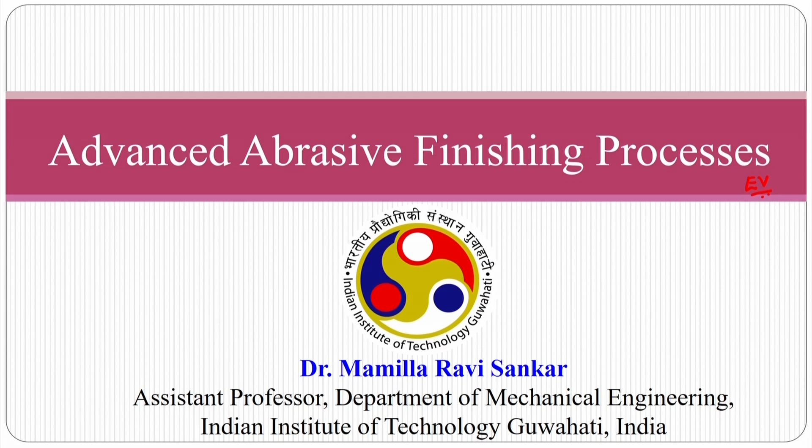Today we are going to study about advanced abrasive finishing processes, which is a particular sector of abrasive processes where you will see advanced versions and do the finishing of complex surfaces as well as simple surfaces.

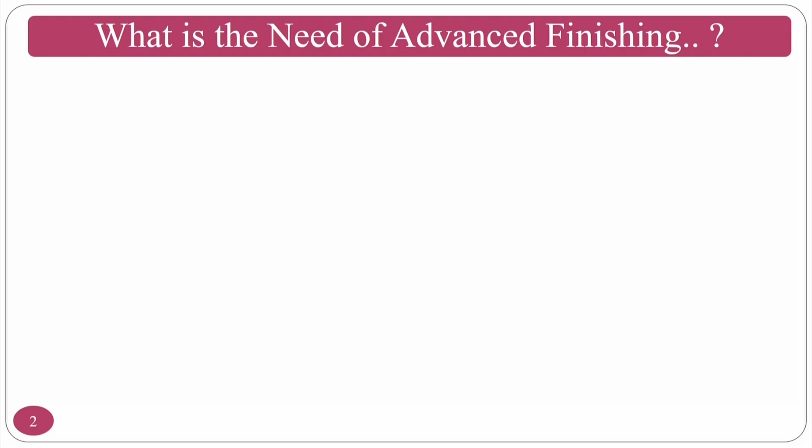So what is the need of advanced finishing processes? Conventional finishing processes such as grinding, honing, super finishing, and lapping you have seen, and we move on to advanced machining processes where MRR or material removal is the primary criteria. Now we move on to advanced finishing processes where our primary criteria is to finish to the nano level of simple to complex geometries.

So what is the need to reduce the friction? It means that if you are going to get the micro to nano surface finish, you can reduce friction and improve fatigue life.

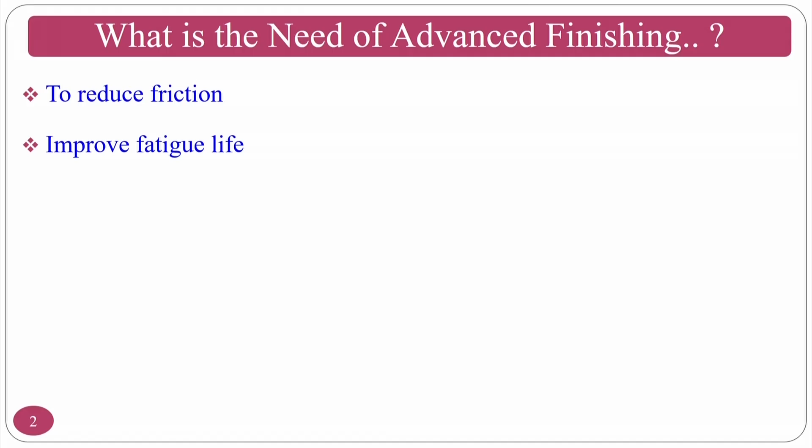If your surface is very rough, what will happen? The fatigue life is very low. Assume you have a shaft and a bush - if the bush is too rough, the shaft will locate on the peaks of the bush surface roughness, and whenever you rotate at high speed, these peaks will burnish or shear off. Then eccentricity will generate and the fatigue life of that system will collapse.

Reduce the generation of crack formation - if surface roughness is low, it can reduce crack formation. Under practical conditions, surface roughness will start initiating cracks. So if you go for nano finishing, this possibility will go down.

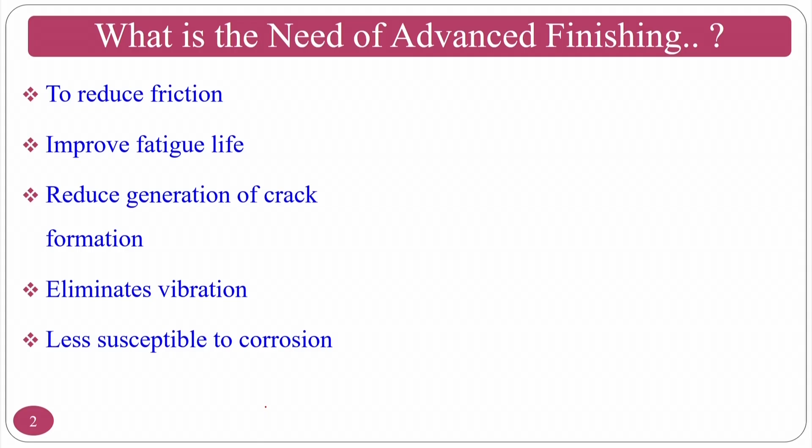It eliminates vibration - a too rough surface always has chances for vibrations in the system. It's also less susceptible to corrosion. If the surface peaks are like this, whenever there is a flow of fluid, the valleys will accumulate the liquid, and this will initiate corrosion and other problems.

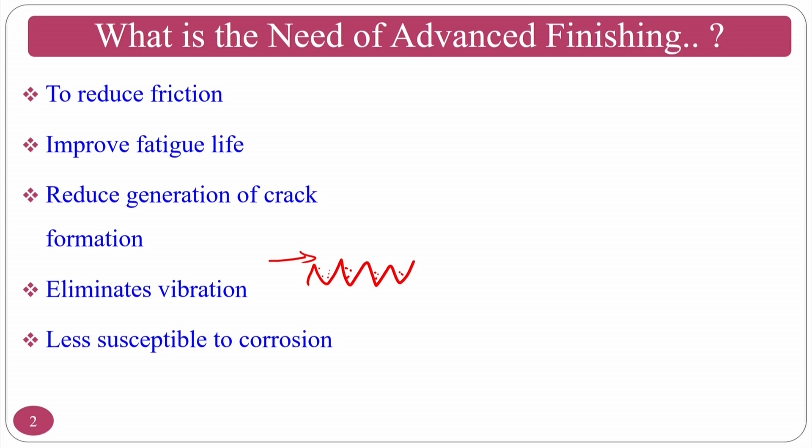The advanced abrasive finishing process also has the advantage that you can finish complex surfaces, such as this small turbine or impeller. Here the initial surface roughness is 1.75 and finally it is 0.4 microns.

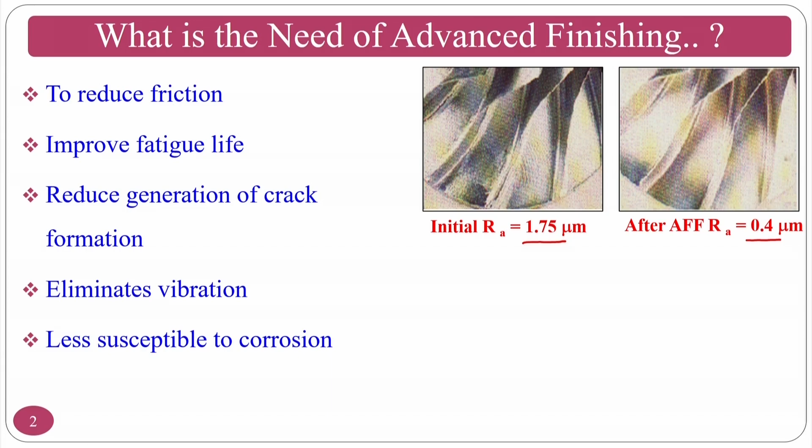The most important thing is that you can achieve this by hand lapping also, but automation is always good. So advanced finishing processes with computer numerical control systems and other things will always be good. One can also finish knee implants by advanced finishing processes - not only abrasive flow finishing process, but also MRF, that is magnetorheological finishing, and other things.

This particular section deals with polymer assisted abrasive flow finishing processes as well as magnetorheological finishing processes, and what are the advantages and limitations of polymer rheological abrasive flow fluids as well as magnetic rheological abrasive flow fluids. We will see these things in depth in this section of the course.

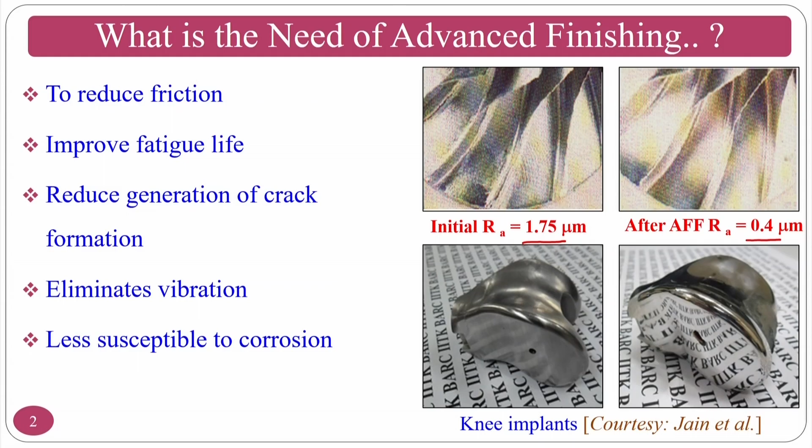We will move on to the first process, called abrasive flow machining process or abrasive flow finishing process. Initially this particular process was called abrasive flow machining process because it was used for deburring applications in complex features, assuming there is a junction of two holes or multiple holes.

At the junction of internal holes - 2 or 3 holes internally - if there is burr generation, it is too difficult for any person to remove it. For that purpose, semi-solid type tools were developed, and you extrude across that section so it will deburr that. Deburring is nothing but a machining operation - that is why when this process was invented in the 1960s, it was called abrasive flow machining process.

Gradually people started using it for finishing applications - that is why this process is also called abrasive flow finishing process.

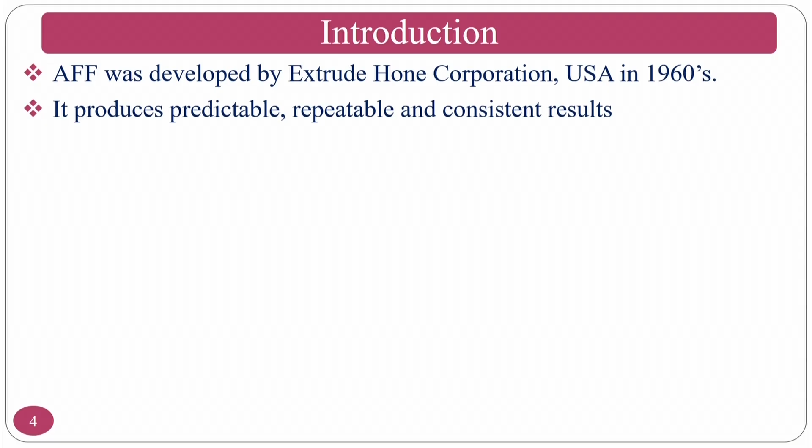Introduction to abrasive flow finishing process: it was developed by Extrude Hone Corporation in the 1960s in the USA. It produces predictable, repeatable and consistent results because of its ability to extrude across sections uniformly. Up to 90% of time can be saved by using AFF compared to hand finishing operations.

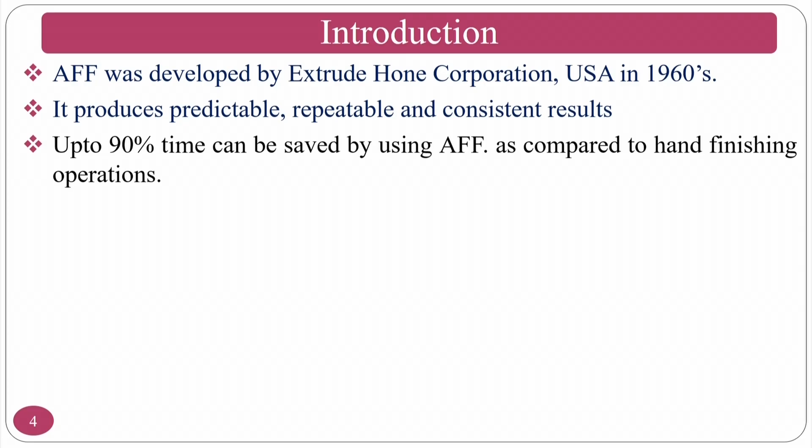Hand finishing operations are not controlled by automation, so to get uniform surface finish you need well equipped and well experienced operators. But in abrasive flow finishing, you can go ahead with automation to do this process. Principal finishing parameters of AFM are setting parameters - that is, input parameters like extrusion pressure, number of cycles, and other things.

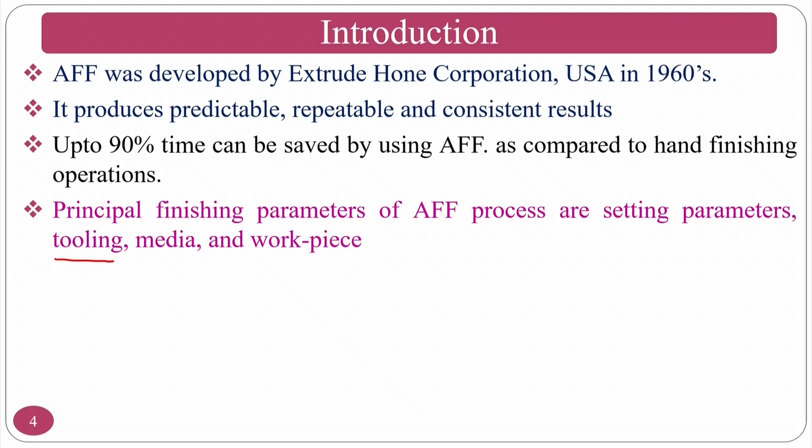Tooling is nothing but how to hold the different work pieces. Medium, that is abrasive medium or media, can be styrene-based polymers or silicone-based polymers, along with workpiece parameters such as initial surface roughness.

It can produce surface finish as good as 50 nanometers and deburr holes as small as 0.2 mm radius, handling edges from 0.025 mm to 1.5 mm. It is easy to integrate AFM into any automatic manufacturing environment.

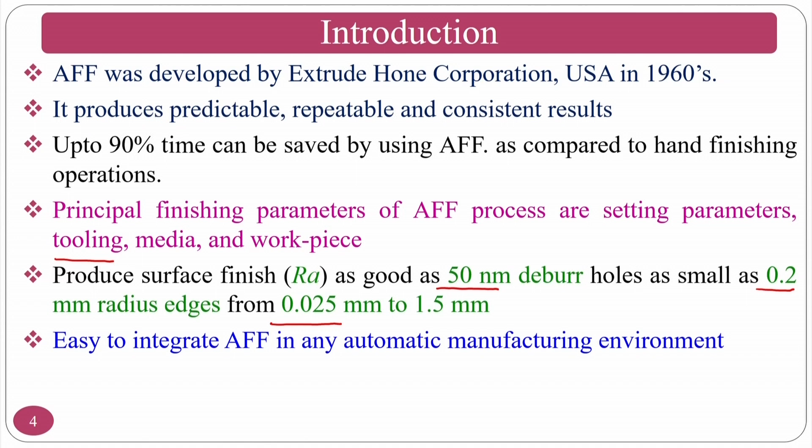By understanding and controlling the process parameters, AFF can be applied to an impressive range of finishing processes based on your requirement. Normally, the finishing operation is the final operation for any type of component manufacture, and 15% of the production cost is always incurred in the finishing operation.

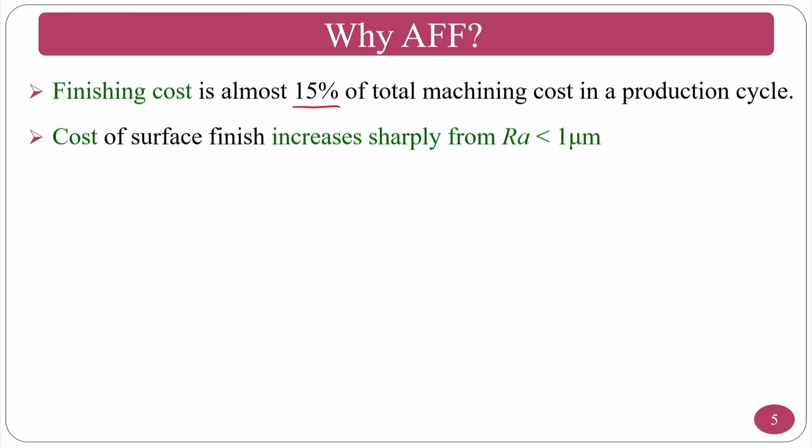The cost of surface finish increases sharply from less than 1 micron. That means if the surface finish requirement is mandatory for a particular component, the surface roughness is inversely proportional to the cost. If your surface requirement is in nanometers, the cost of the product escalates very high. So if the roughness requirements are low, then the cost of the product goes up.

Abrasive flow finishing, or abrasive flow machining, produces extremely thin chips, allowing better surface finish, closer tolerances, and more intricate surface features. Predominant texturing has also been observed.

It can finish hard and difficult surfaces, like hard materials or hard steels. It can be automated and offers better accuracy, efficiency, economy and consistency, and this process is also used for producing compressive residual stresses.

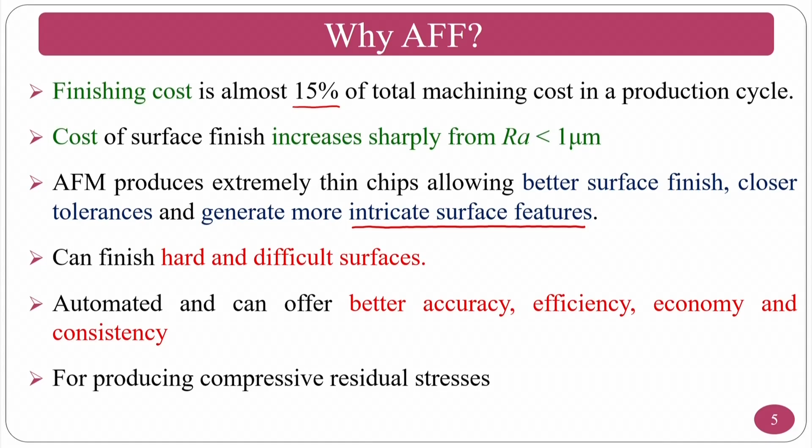When reciprocating the medium across the workpiece, as you will see in upcoming slides, there is a possibility of compressive residual stress generation. Some papers on abrasive flow finishing have reported these compressive residual stresses being observed. If compressive residual stresses are present, it is always good for practical applications.

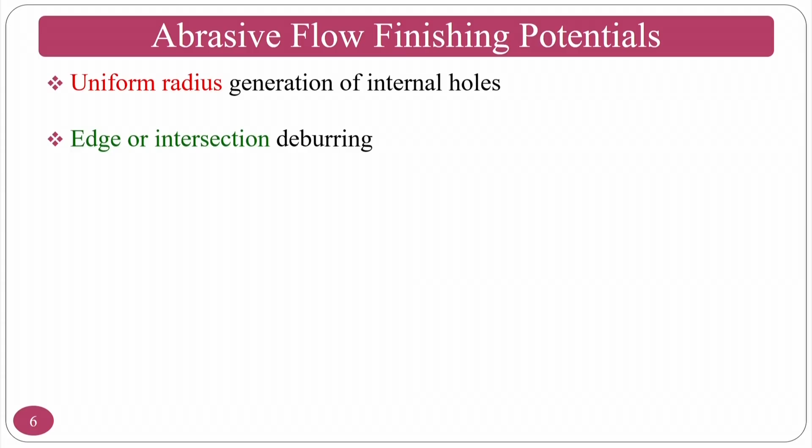Looking at the potential of the abrasive flow finishing process, uniform radius generation on internal holes can be achieved. Edge or intersection deburring, where two holes intersect internally, is completely difficult for a conventional finishing process to handle at that location.

For this particular process, it will be easy because you are going to use a liquid to semi-solid type of tool. How to fabricate or design this type of liquid-based tool and other aspects, we will touch on in the introduction.

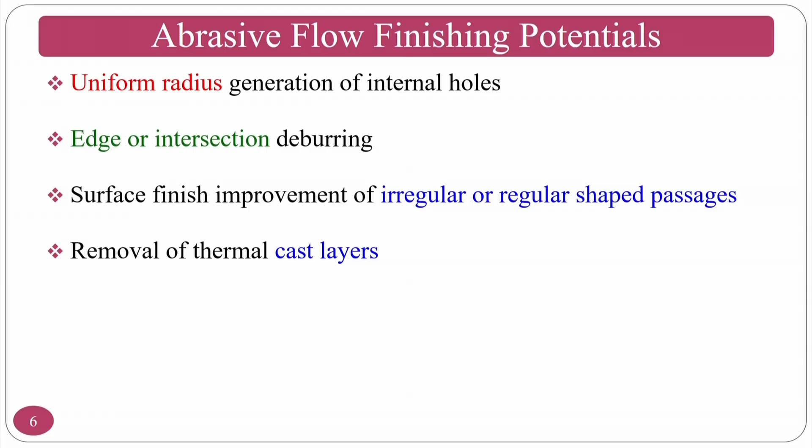Surface improvement of irregular and regular shaped passages can be achieved, along with removal of thermal recast layers. Whenever you have done processes like EDM or laser beam machining, these thermal processes form a recast layer, as we have seen in previous classes.

This recast layer is not good for practical application because it is a brittle layer, and thermal cracks will be present. When used in practical conditions, this recast layer will come off, causing eccentricity and a lot of noise and other issues. That is why it has to be removed before being put into practical applications.

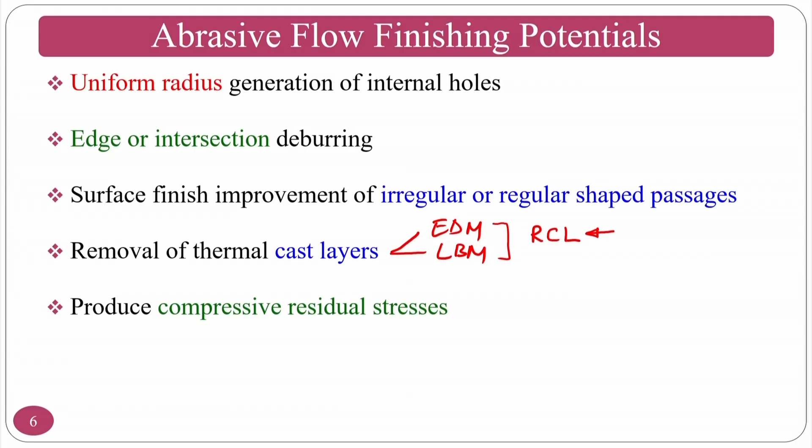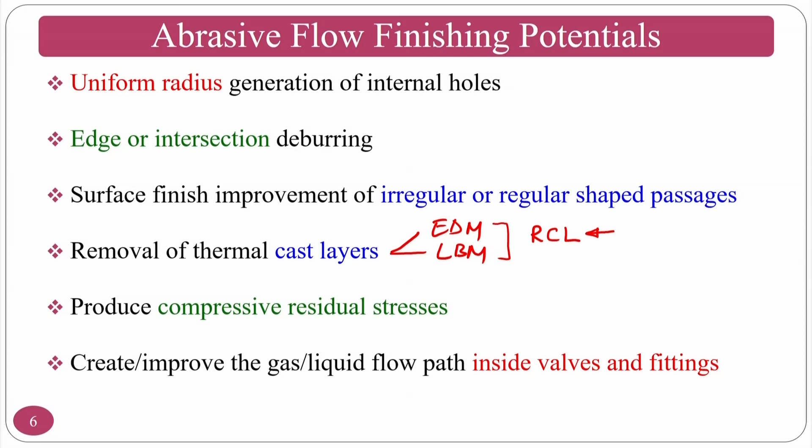It produces compressive residual stresses, which we have seen, and this is good for practical application. At the same time, it can create or improve liquid flow paths inside valves and fittings, which means it can be used for fuel injector nozzles and others where fluid flow is most important and needs to be controlled. There you can achieve surfaces to the nanoscale for better surface finish.

If you look at the AFF process, it has a lot of elements, and we will see the individual elements in the upcoming slides. This is how the AFF process, or abrasive flow finishing process, looks like.

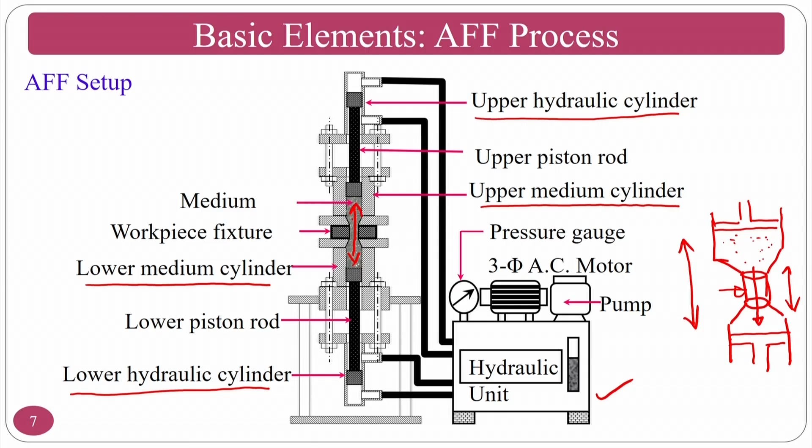For that purpose, the hydraulics unit will supply hydraulic power, which is controlled by a solenoid valve. This solenoid valve changes direction once the piston reaches the maximum limit, moving from top dead center to bottom dead center, and then the other bottom cylinder piston will actuate. I will show you clearly how the finishing region takes place.

You can see here the medium is placed in the top medium cylinder. This is the medium, and this is the upper medium cylinder, this is the lower medium cylinder. So the medium has to transfer, or push, to the lower medium cylinder across the workpiece. This is the workpiece.

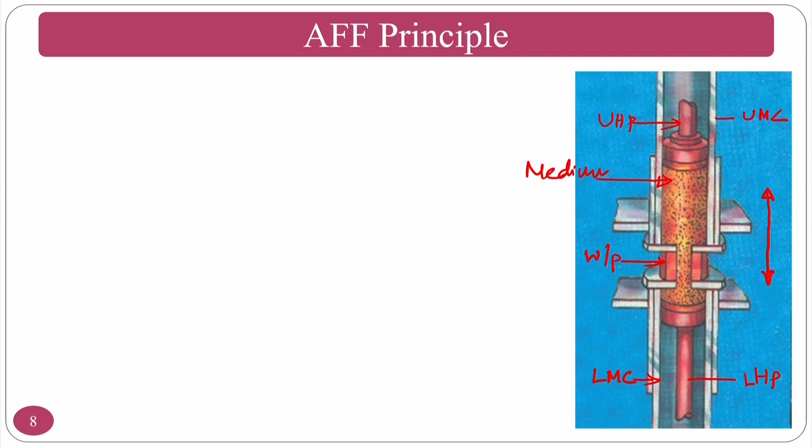What will happen here is the medium is reciprocated like this first, then comes back to the original position. This is the upper and lower hydraulic piston. So if you are reciprocating the abrasive medium, which consists of polymers plus abrasives and other things, it will reciprocate, and whatever internal surface needs to be finished in the workpiece will be finished. Hope you understood.

I have an upper medium cylinder, a lower medium cylinder, and in between a fixture where the workpiece is fixed. Now my intention is to flow my liquid type of tool from top to bottom, bottom to top. For that purpose, both the pistons will move up and down, or reciprocate.

Whenever the lower medium cylinder's piston pushes, the medium flows across the surface finishing zone of the workpiece and reaches the top medium cylinder. Once the top medium piston pushes back, it comes again to the lower medium cylinder across the workpiece. So this reciprocating nature of the medium, which consists of abrasive particles, will shear off the surfaces to be finished in the workpiece surface.

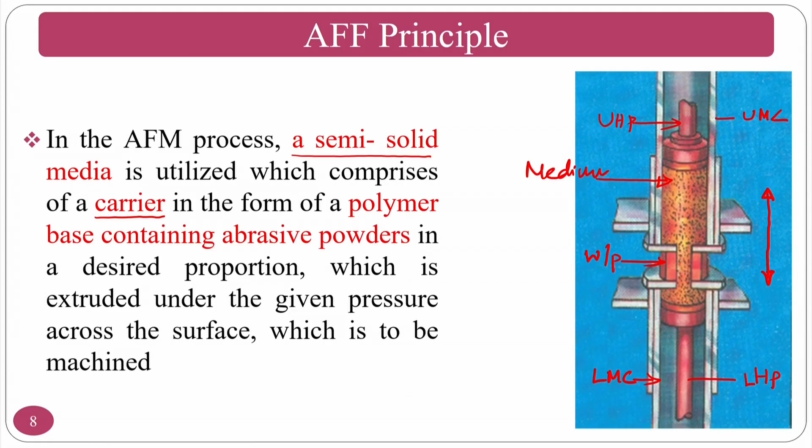So in the AFM process, a semi-solid media is utilized which comprises the carrier fluid in the form of a polymer base containing abrasive powders in desired proportion, which is extruded with a given pressure. That is what I explained, that it will move up and down and material will be removed in the workpiece region wherever it moves across the surface.

Now, how will the material be removed? There is physics behind it. So assume that the finishing region is this particular figure 1. What is happening here is, whenever extrusion pressure P is applied, you have a medium that is viscoelastic. This ash color is nothing but the viscoelastic medium.

This is a viscoelastic medium. Viscoelastic means it consists of a viscous component and an elastic component. The viscous component tries to move along the direction of applied pressure, meaning the medium will be pressurized in this direction. So the viscous component moves in the direction of the pressure, and the elastic component moves perpendicular to it. Whenever you take honey or any viscous fluid like water, and throw it with a certain pressure, what happens?

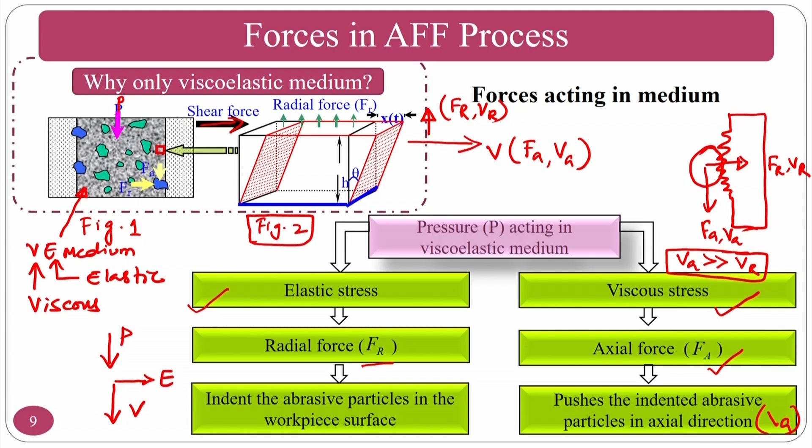What is the main function of radial force? Radial force tries to indent into the workpiece surface, or penetrate into the valley, and it tries to shear the peak with the help of axial force and axial velocity. It indents because of the radial force and moves in this direction because of the axial force and axial velocity. Combination of radial force, axial force and axial velocity gives you a microchip or nano chip, and material removal takes place.

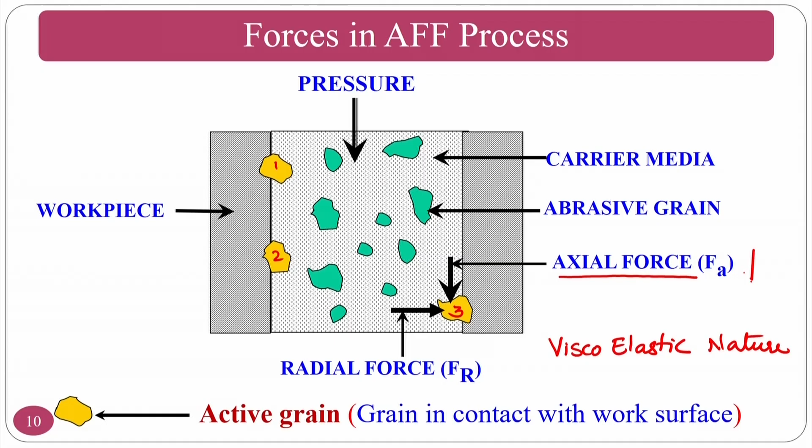Because of the viscoelastic nature of the medium, what is happening here is you can see the axial force along the direction of the applied pressure, at the same time radial force because of the elastic component in the medium. In the previous slide it was congested, so the explanation might not have been up to the mark. For those who have doubts: the viscous component is generating the axial force and the elastic component is generating the radial force.

Assume that I have this particular surface. Whenever my abrasive particle is like this, the radial force will indent like this and the axial force will move, the axial velocity will move here and FR will be there, because of which the shearing action takes place. Shearing of the chip takes place and material removal occurs.

What about the inactive abrasive grains? This particular medium has three properties. One, it is self-deformability. Second is better abrasion and better flowability. So these are the three main components of this medium: one is self-deformability, better abrasion, and the third one is better flowability, flowing ability.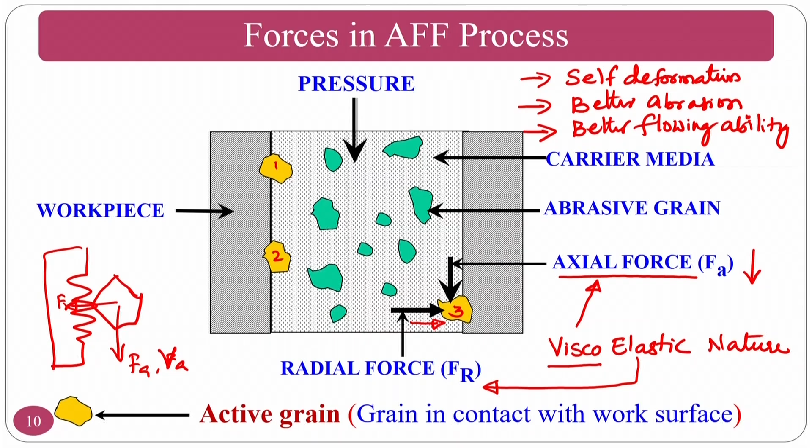So, material removal mechanism, which we have seen here. So, viscoelastic nature is there, and the abrasive particle, as we have seen, gets assistance from the viscoelastic polymers.

So, viscoelastic polymers, if you see here, this is the axial force and this is the radial force, and this is the resultant force. Assume that it is a cutting force or something, the resultant of this one. So, the viscoelastic effect is there, because of which these peaks will be sheared and you can get a good surface finish.

After getting a good surface finish, you will achieve a critical surface roughness value for any type of finishing applications whenever you play with respect to input parameters like number of cycles, extrusion pressure, medium variables, and other things.

So, with respect to number of cycles, what do you mean by number of cycle? If you see figure 1, the medium is reciprocated like this. The medium from the top cylinder to the bottom medium cylinder is called one stroke, and if it is reciprocated back, that means bottom medium cylinder to top medium cylinder, this is called one cycle. That means one bottom stroke and one top stroke is nothing but a cycle.

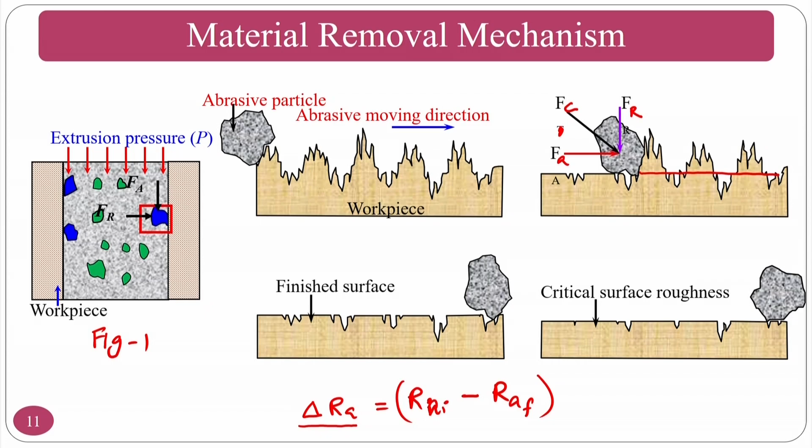Basic elements of abrasive flow finishing: one is the machine setup, that is the experimental setup which is hydraulically operated cylinders used for back and forth motion of abrasive putty and the pistons, as well as medium cylinders. All these things come into the machine setup.

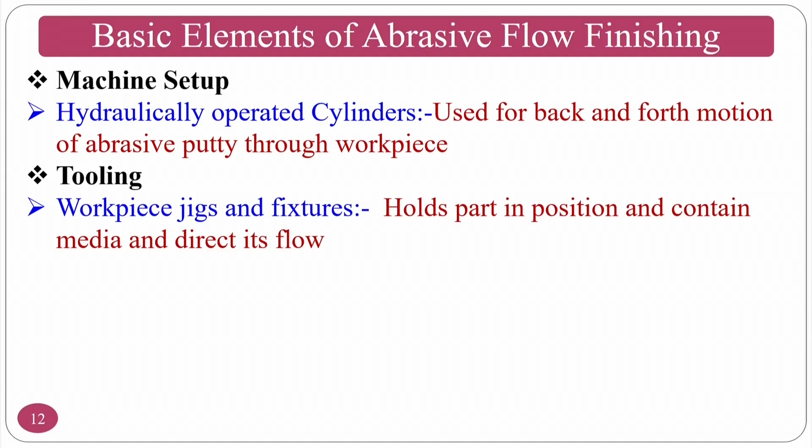Then the tooling, which is basically the workpiece fixtures. If I want to finish a knee implant, my fixing devices hold the knee implant so that medium flows across the surface uniformly. That is the fixture or tooling. If I want to finish a hollow cylinder, minimal tooling is required, but for a knee or hip implant the fixture will be different. So tooling will vary from component to component.

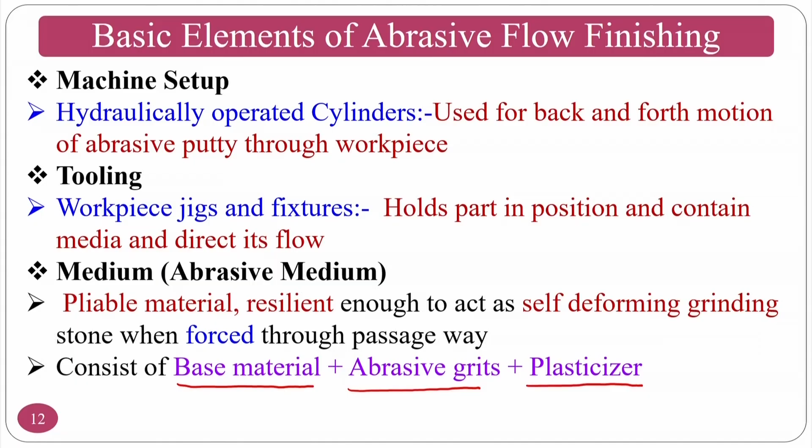The abrasive medium is a pliable material, resilient enough to act as a self-deforming grinding stone when forced through the passageway. It consists basically of base polymer materials, abrasive particles, and rheological additives such as plasticizers, hardeners, and so on. These are some of the constituents of the medium used in the abrasive flow finishing process.

The first basic element of the abrasive flow finishing process is the machine tool. This is a machine tool drawing - if you want to develop your own, the dimensions are given. This is a laboratory scale development with various motions, so that you can accommodate different size and shape components.

This is the main support on which you are mounting. This drawing is done for a radial drilling machine - this support came from the radial drilling machine, and we have replaced the other systems with respect to the medium cylinders.

This is the upper medium cylinder and upper piston, the upper hydraulic piston. This is the lower medium cylinder and lower piston, the lower hydraulic piston. You connect the upper and lower hydraulic pistons to the hydraulic power pack, which is not shown in this picture, and you can reciprocate it.

What is missing here is the medium is not placed in the medium cylinders. These are the two medium cylinders, and the tooling has to be placed here so it can be finished. These are the different things not included.

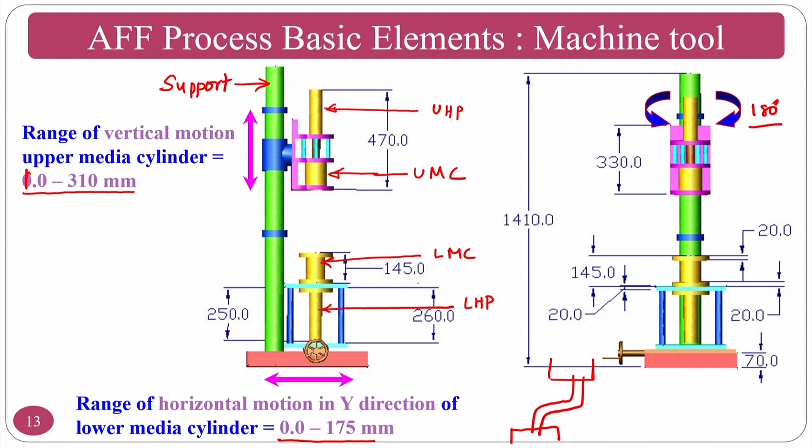This is the experimental original picture - whatever you saw in the previous slide was the schematic drawing. In this experimental setup you can see the lower medium cylinder, upper medium cylinder, upper hydraulic cylinder, lower hydraulic cylinder, and the hydraulic power pack - everything is there, along with the pistons which push the medium so you can get the finish. What is missing here is the fixture and medium.

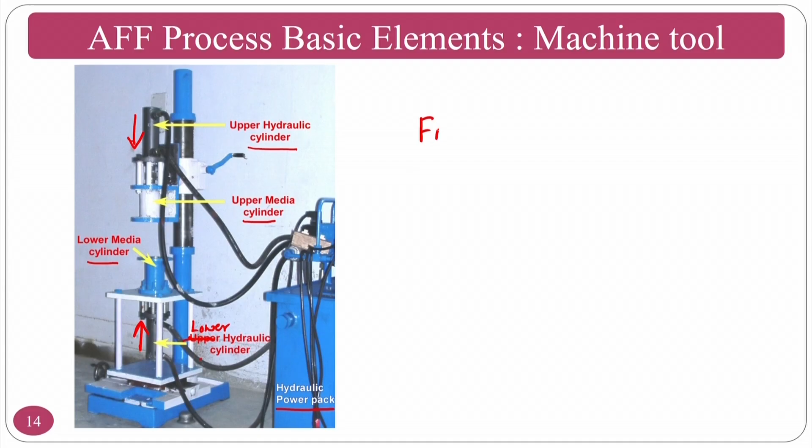Both the fixture and medium are missing. We will see these two elements in the upcoming slides. So the second element is tooling or fixturing.

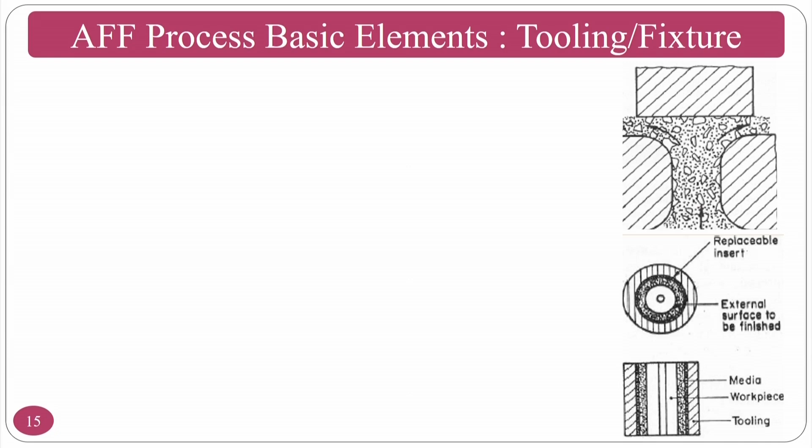Assume I want to finish this particular component - I need to give the tooling as per the requirement, used to confine and direct the flow of medium to appropriate areas, meaning it has to guide the abrasive medium across the surface. The abrasive medium is a semi-solid medium that has to flow across the surface to be finished. If it flows uniformly across the surface, uniform surface finish can be generated. So the tooling's function is to guide the medium across the surface to achieve uniform surface finish.

The tooling also selectively permits or blocks the flow of media into or out of workpiece passages where deburring, radiusing, and surface improvement are required - meaning it has to permit flow only to the regions requiring finishing, and should not go into other regions.

Now we have seen one of the elements of abrasive flow finishing process, that is the experimental setup or the AFM machine setup. So now we are going to see the second element, that is called tooling or fixturing.

The basic function of the tooling or the fixture is to hold the workpiece in position and make the medium flow across the cross sections to be finished. Okay, so how will it do that?

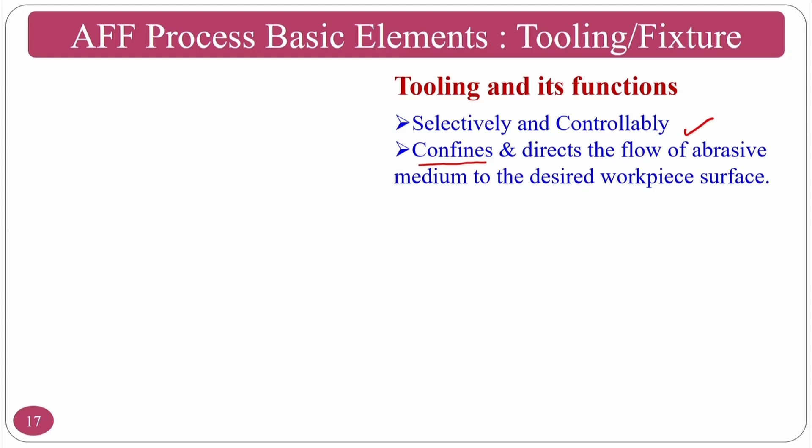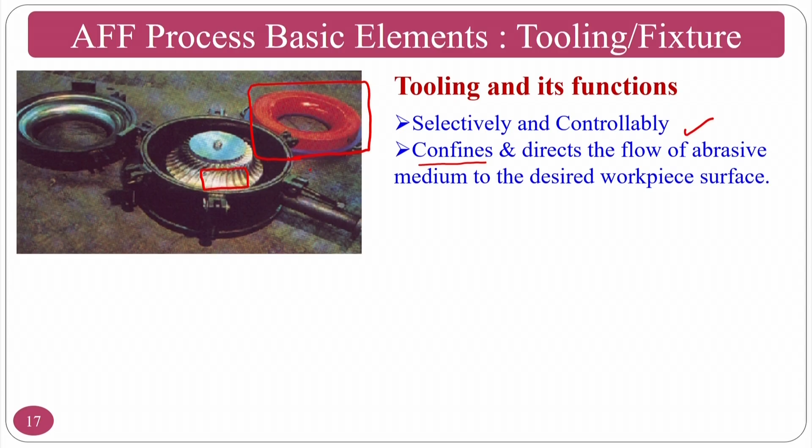These are the workpieces to be finished initially. This is the one to be finished, and this is kept here. You can keep it and put the fixturing, place the medium initially, and start the finishing process. This is nothing but the tooling or fixturing.

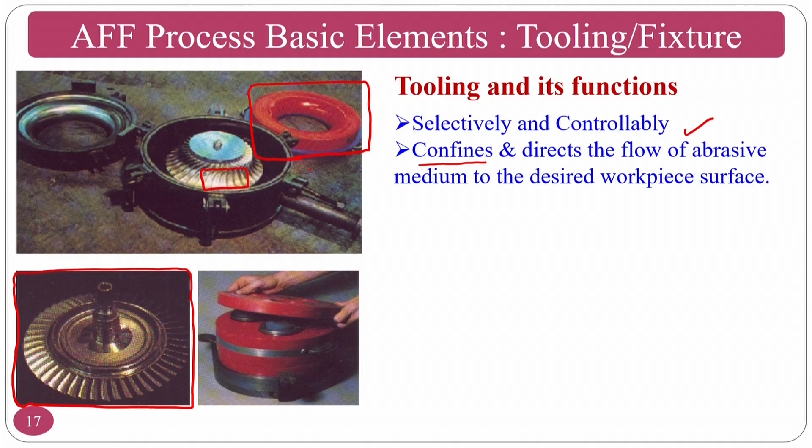This is the measure, and you can see the before and after finishing. Before finishing it is 1.75 microns, and after finishing it is 0.4 microns. This is how the casted blades can be finished.

So hope you understood now what the function of the tooling or fixturing is: to hold the workpiece firmly, while directing the medium across the surface uniformly and controllably to finish that particular section only, not the other sections.

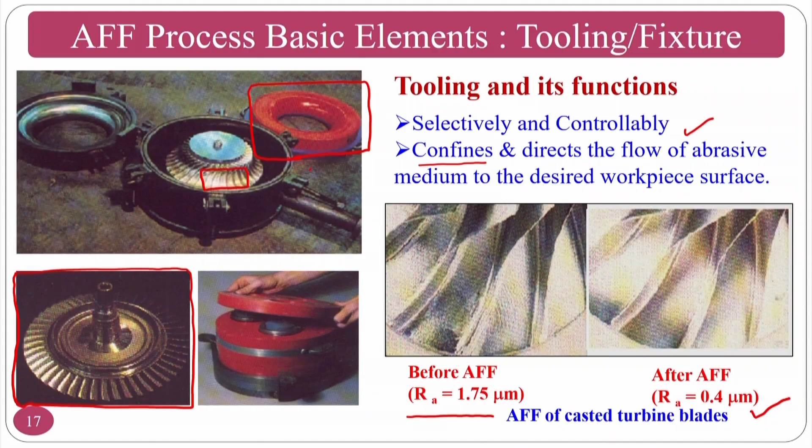Looking at the other functions of tooling and fixturing, it is used to confine and direct the media flow to the appropriate areas for finishing, selectively permitting or blocking the flow of media into or out of the workpiece passages. That means it should not let the media pass out of the workpiece passages, but direct it only to the surfaces where deburring, radiusing or surface improvement is required. It should not allow the medium to move out of these confined regions.

The passages of similar nature are processed in parallel. That means you can finish many holes or many parts in a single go by using proper fixturing.

Replaceable inserts means you can go for nylon, Teflon, or hardened steel type replaceable inserts so that you can stop or restrict the media flow from entering restricted regions. For non-uniform cross-section MRR, the narrowest section has minimum material removal and the widest section has the most, as you can see here.

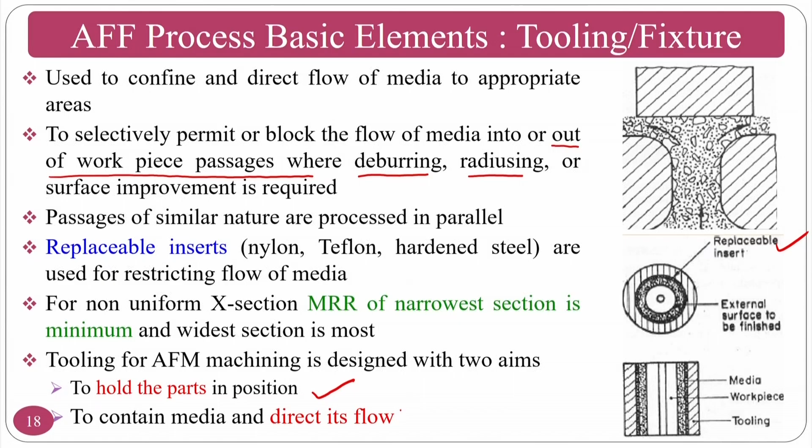Tooling for abrasive flow finishing or abrasive flow machining is designed with two aims: to hold the workpiece in position and to direct the medium flow. This is what I was discussing in the previous slide also.

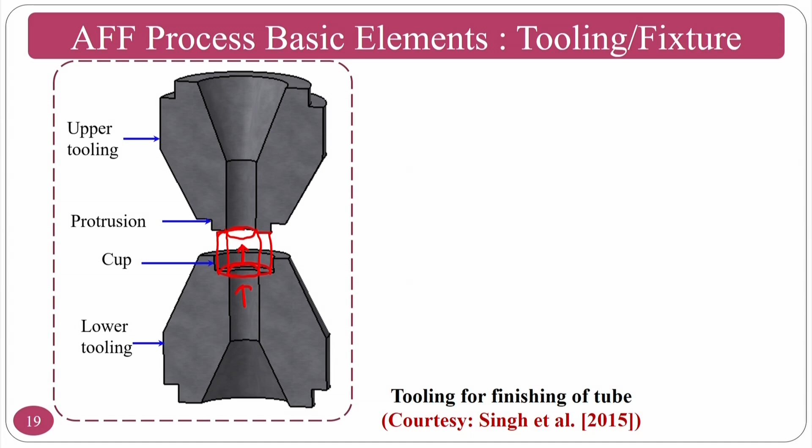Okay, suppose I want to finish a cylindrical workpiece. For that purpose, you can have a cylindrical workpiece and a fixture - to help you understand, we put this particular thing, and this can be the outer diameter and this can be the inner diameter, so that medium flows in the finishing region only. This way you can finish the internal surface of the hollow cylinder and use it in various applications. Similarly, the fixturing can also be done for finishing bevel gears and other things.

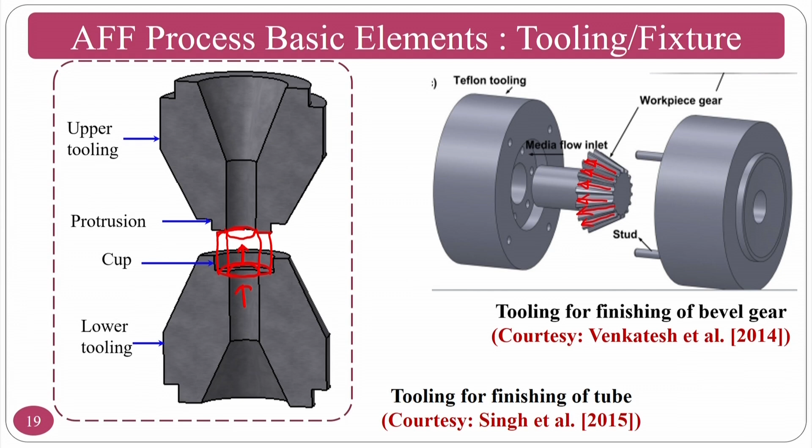Now, if I want to finish a flat surface, assume this is my workpiece and I want to finish it. Till now you have seen cylinders and bevel gears. What about flat workpieces?

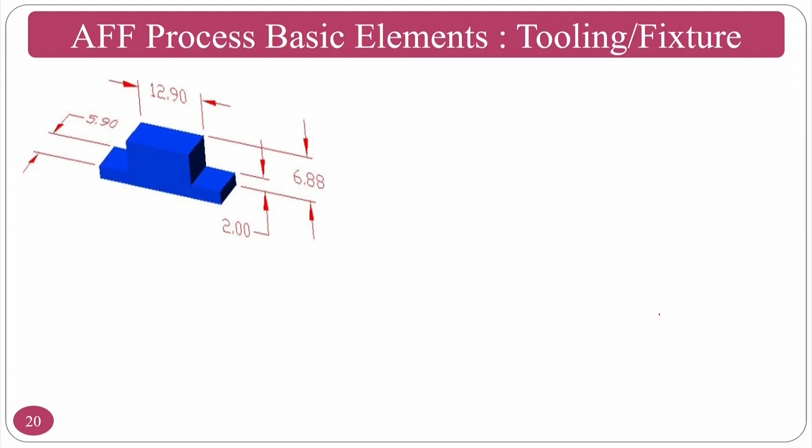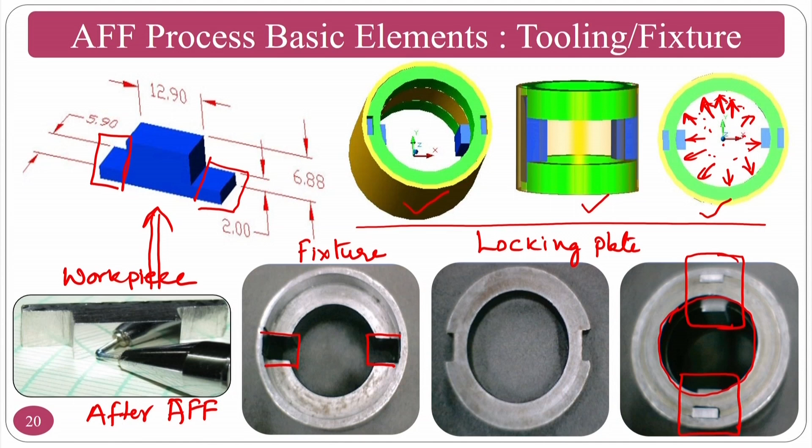So we have seen two elements: one is the machine setup or machine tool, then the fixturing or tooling. Now we move on to the third and main element of this abrasive flow finishing process, which is the abrasive medium.

Normally it is called the polymer rheological abrasive medium, since it comprises polymers, rheological additives, as well as abrasive particles. That is why this medium is called polymer rheological abrasive medium, or if very low viscous fluids are used, it's called polymer rheological abrasive fluid.

This particular medium ranges from semi-solid to liquid phase, so you can call it a medium or a fluid. The plural for medium is media. Many people work on this area for their PhD or master's research, and it is a good area to pursue. Our group also works extensively in this area. The medium is the most important and critical component of the abrasive flow finishing process.

This picture is taken from Extrude Hone, which is now called Kennametal Extrude Hone. The medium has base polymers, viscoelastic polymers with rheological properties, and fine abrasive particles.

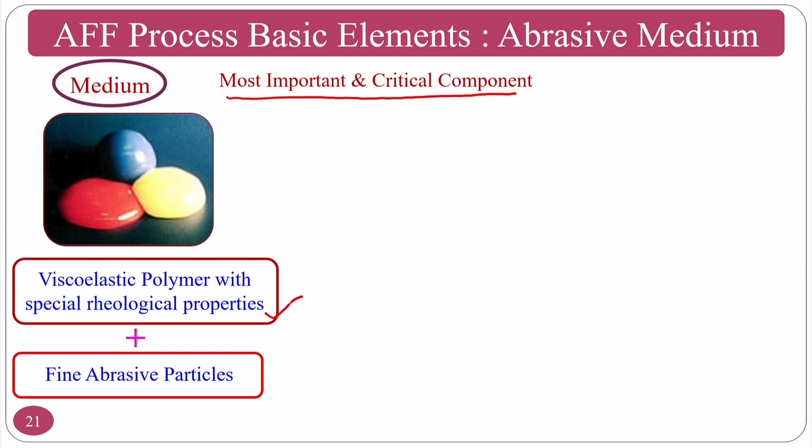What are the rheological additives normally used? Many types of viscoelastic polymers exist, but the commonly used one is polyborosiloxane. Many companies commercially produce this polymer, one of the best examples of viscoelastic material, and this material is blended with rheological additives such as softeners, plasticizers, hardeners, functionalizers, and so on. For low viscous types, functionalizers are added for holding the abrasive particles in location. Many such additives are used.

So one can explore so many varieties of rheological additives. Apart from that, people also use some chemicals to preserve this particular material for a long period without affecting bacteria or any type of microbes.

As I said, the medium should possess majorly three things discussed in the previous slides: self deformability, better abrasion, and better flowability. This is one of the complex things finished here. You can see the medium flow, how it is deforming itself as well as flowing across the section to be finished, and the medium looks like abrasive particles blended with polymers.

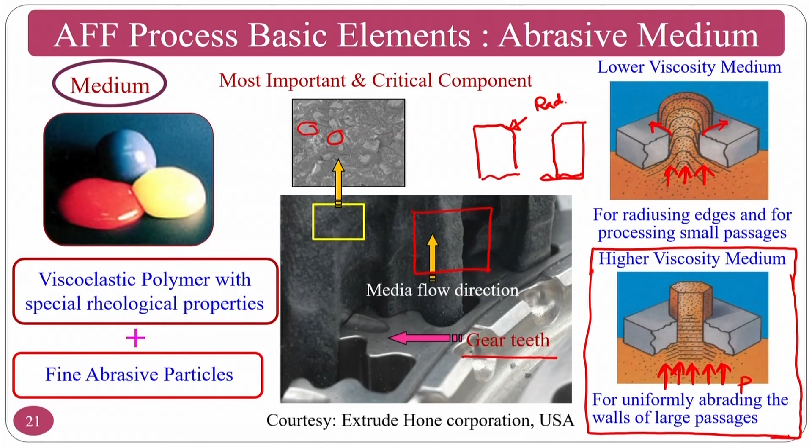So this particular thing will become radiusing. Whenever you get a particular component like this, it will always be safe for people. This is called radiusing - that is the beauty of this particular process, especially when using low viscous medium.

For finishing as well as slight radiusing applications, you can have a medium in between low viscous and high viscous medium, as seen in the figure. This is high viscous medium, this is medium viscous medium, and this is low viscous medium - let me write it at the bottom since red on red may not be visible.

So you can have three common varieties supplied by Kennametal Extrude Hone. You can purchase it, but the basic issue with this medium is that it is too expensive for a developing nation like India, and at the same time you have to discard it once it reaches 10% of its original weight.

As you might have seen with the tool life of a single point cutting tool, whenever the flank wear land exceeds 0.5 mm (500 microns), you discard it. Similarly, the medium life is exceeded when it exceeds 10% of its original weight - meaning if I purchase 1 kg (1000 grams), whenever it exceeds 1100 grams, you have to discard it.

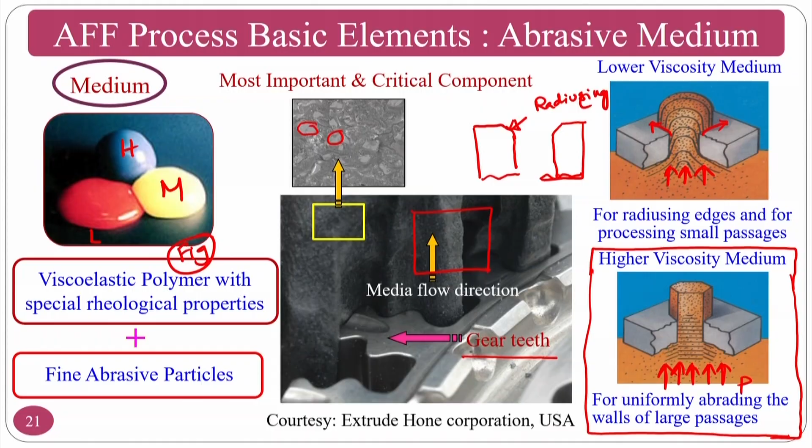So you can see the medium normally. The medium has a lot of abrasive particles in the polymer rheological abrasive medium, where you have polymer, rheological additives, and abrasive particles. So these are the three varieties of things. Polymers are normally solids or semi-solids. Rheological additives are mostly liquids, as well as some solid particles, and abrasives will be solid or ceramic particles. This particular thing is a combination of liquids and solids mostly.

So this is a two-phase medium where you can have interaction between the different things. If you can enlarge the medium, you can see how the abrasive particles are held in the polymer networks. If you see here, this is an abrasive particle, and you can see how it is blended and how it stays inside the medium. There can be many possibilities: polymer-to-abrasive contact can be one, and abrasive-to-abrasive contact is another, and there can be many other things.

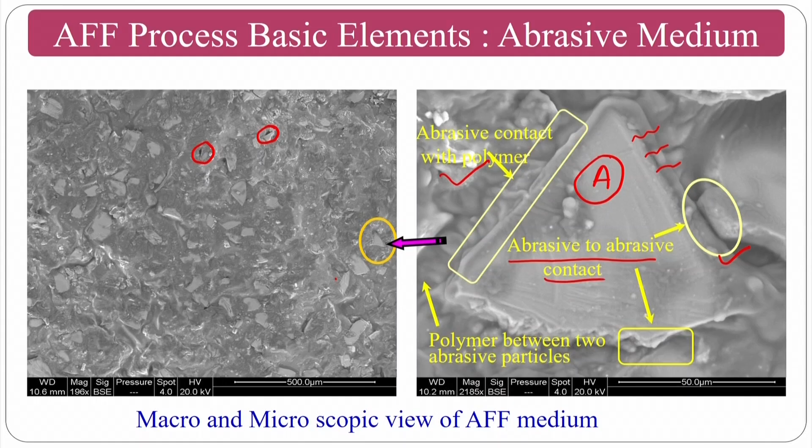For that purpose, commonly the polymer network dimensions are approximately nanometers, but at the same time your abrasive particles are approximately 50 to 100 microns. So how will it work? Normally your polymer networks will be bound together, and at the same time you use rheological additives to hold it. This is a big chemistry to understand - how the polymers and rheological additives are blended, which part of the polymer chemical is attaching to the rheological additives, which part of the chemical bonds of the rheological additives then attach to the silicon carbide or Al2O3 or these types of abrasive particles. All those things can be a good study.

So you can see here the medium in a gross spectrum, and at the same time you can see a close-up view also in the second slide. Figure 1 shows the abrasive particles as well as the chips. If you zoom in you can see Figure 2, where you can see small fragments of the workpiece. This particular medium has a lot of polymers, plasticizers, and other rheological additives along with the silicon carbide particles.

These silicon carbide particles get held viscoelastically by the various rheological additives, and they finish the workpiece material. The workpiece material here is pure aluminum. That's why you can see the chips shining. Not only that, if you look closely at the abrasives, if you use them multiple times, the abrasive particles also become blunt. This is another phenomenon - sharp edges of the abrasive particles become blunt because you use these particles for hundreds and hundreds of cycles, like 200, 300, or 400 cycles.

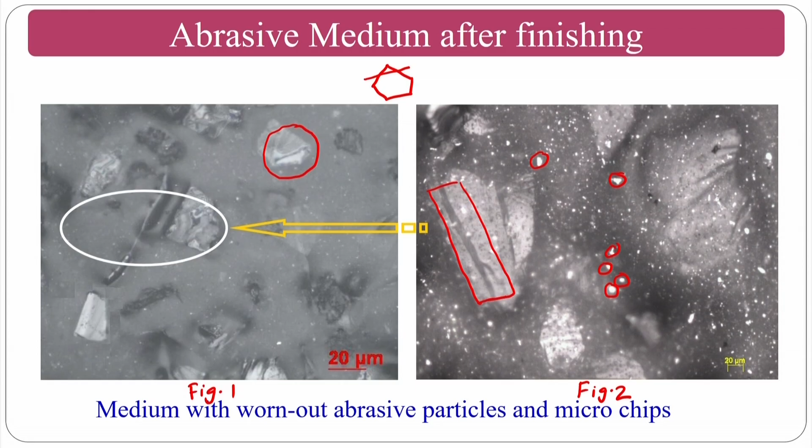So the summary of this class is that we have entered into the advanced abrasive finishing processes, and we took up the first and most important process, called abrasive flow machining and abrasive flow finishing process.

Why is it called abrasive flow machining process and abrasive flow finishing process? Since this process uses a semi-solid to liquid type of cutting tool, it is mostly used for internal holes where intersections and burrs are present. It was mostly used in the 1960s to 80s for deburring applications, because solid cutting tools cannot penetrate into those complex regions. For that purpose, liquid or semi-solid tools are fabricated and used for deburring applications.

That means the removal of burrs formed in internal complex regions. That's why this process was initially called the abrasive flow machining process. Later on, people started using it for nano finishing applications, which is why the name was amended to the abrasive flow finishing process.

In the abrasive flow finishing process, we saw the material removal mechanism initially with respect to the viscoelastic medium, and how forces are generated whenever extrusion pressure is applied. Here you have an axial force and axial velocity, since both are in the same direction as the applied extrusion pressure, and a radial force and radial velocity perpendicular to that axial direction. But since the indentation velocity is so low compared to the axial velocity, it will be neglected.